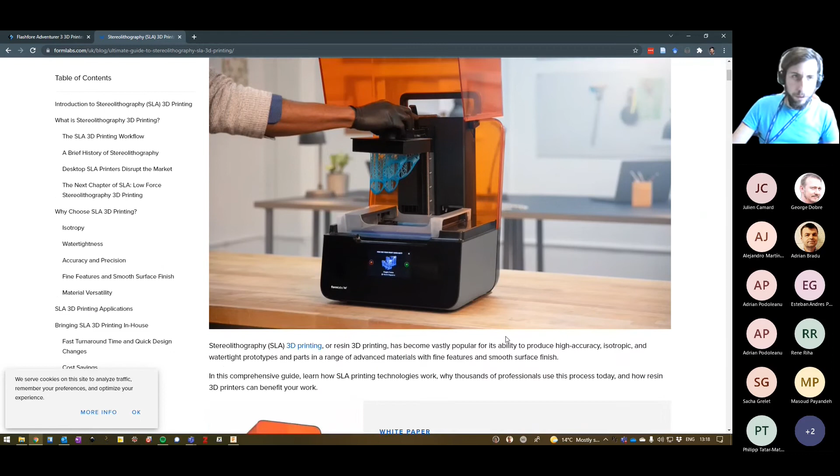And so afterwards you can wash the rest of the resin and are left with some solid bits. And because you are using effectively an optical system, the resolution is actually better. But I don't really want to go into too much detail here. Firstly, because we don't have such a printer, and secondly, because it's not something I've researched that much, precisely because we don't have one. So we are going to focus on this printer, and I'm going to show you later how you can load things into it, but I just wanted to give you a brief 5-minute introduction to how these printers work and what their limitations are.

And one of the obvious limitations is when you build something to put in your system, chances are you might need to bolt it somewhere, or you might have components that you want to immobilize inside the 3D printed component, which means you will probably want to put a set screw at some point and put threads. And that is a problem, down to the limited resolution, and also down to the material itself being quite brittle. Threads are kind of the Achilles heel of these printers.

So a more clever idea than trying to model a thread in the 3D modeling software and then getting the printer to print it, is to do what we call a nut capture. A nut capture is, as the name implies, a structure to capture a nut. So a hexagonal nut that you use in the lab. You've got lots of them lying about in your labs. You create a hex-shaped hole, and you've got the dimensions for them. And after you've printed the part, you simply drop the hex nut in there, and that forms the thread, if you want to call it that.

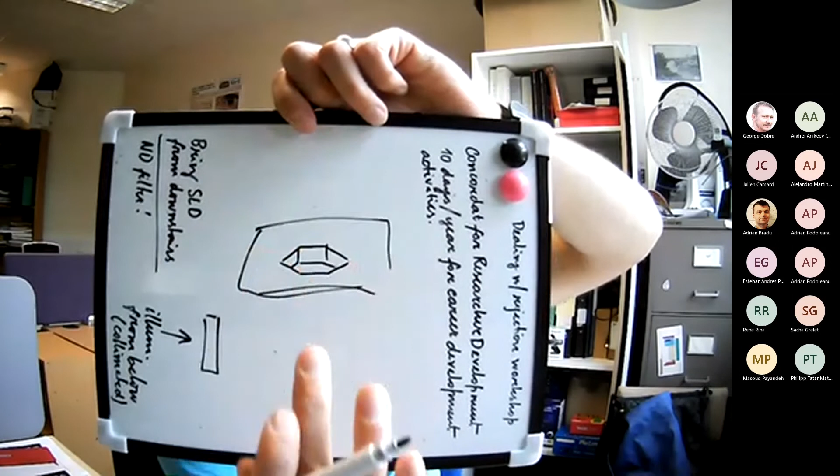This is not going to work because if we want to screw it in, the motion of putting the screw in is going to pull the nut out. So we actually want to insert the nut capture down here, and then the screw can come from the outside, but the nut will press against the inside of the structure. Does that make sense?

And another nifty trick that I learned recently is you can make the nut capture ever so slightly narrower than the nut itself. Then you grab the soldering iron and use it to touch the nut and heat it up, and because the melting point of PLA is only 210 degrees, the soldering iron will be on 300, 400 degrees easily. Well, probably not 400, but it will be higher than 210. So you heat up the nut, and the nut will effectively melt the surroundings and lock itself in quite neatly. So that's quite a good thing to do.

Strength of the material, that is an important thing. So obviously, anything that is extremely load bearing, I think that goes without saying, you shouldn't do 3D prints on. I mean, most of our components are relatively lightweight, or lenses, collimators, etc. So that is not really a problem. But if you do the model properly, you can actually have a little bit of strength.

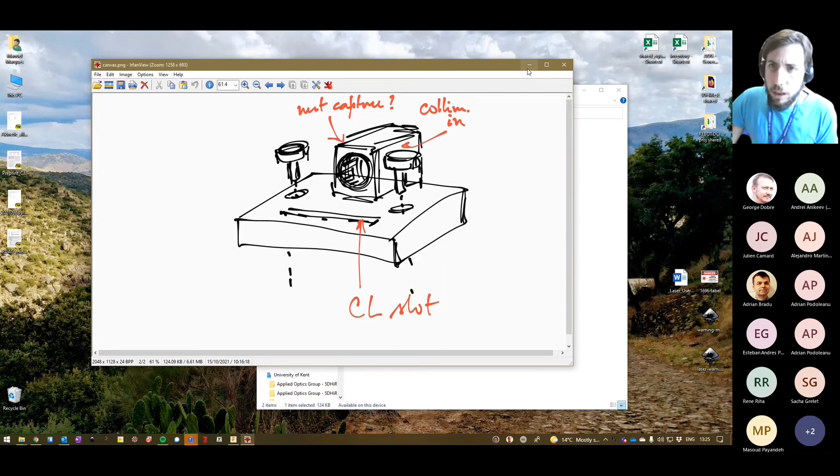So you start with a sketch, then you go in the lab and you measure the actual distances. So this is a top view of the same bracket, and now I know the space between these 2 holes is 150. You make a note, actually I didn't make it here, of the diameter, what kind of screws you need, to make sure you've got enough clearance to get them through. What is the diameter of the collimator, and what is the focal length, or the distances between the collimator and the cylindrical lens. Not that critical because this beam is going to be collimated anyway. And all of that.

So you do all of these bits, and now you're ready to actually take this and open a software to create your 3D model. So if you looked in the notes that I've circulated ahead of this, there were a number of different softwares that I suggested. There was a big list. You've got lots, the sky's the limit. There are some free ones, there are some commercial ones, there are some that have completely different paradigms.

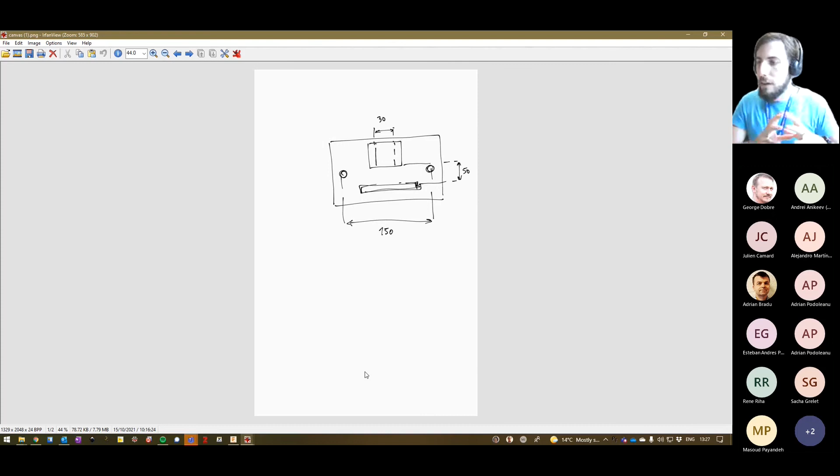So the one on the bottom of that list, OpenSCAD, I was recommended that software by Dave Pickup a few years ago because, well, he likes that kind of thing. And effectively, it's a bit like the LaTeX approach to 3D modeling. You write the different constructs in code, and then you see the rendering straight away. So if you don't like LaTeX, OpenSCAD is not for you.

But actually, for the vast majority of things, and to get something done really quickly, Fusion from Autodesk is very, very good. And because we are in campus, they actually offer it for free for educational use. So you basically go there, you say you're in a university, and you get access to a 1-year license. Then the following year, you just go there again and renew the license. It's that simple. And Fusion is relatively intuitive, so that's what we're going to be using today.

But I should stress, it isn't the only software. Effectively, anything that exports a file with the STL extension, which is an extension you'll see a lot for 3D models, can work in this. So you're not limited to Fusion. You can use whatever you want. And there are some open source ones like FreeCAD, which I know Andy was using. Obviously, if you're more of a SolidWorks person, you can use SolidWorks.

Right, so let's build a simple model, based on that sketch that I was doing. So we start with this view. I don't know if anyone wants to follow on their computers, but if not, I will just build it here. And because this session is being recorded, you can watch it later on and follow it as I'm doing it.

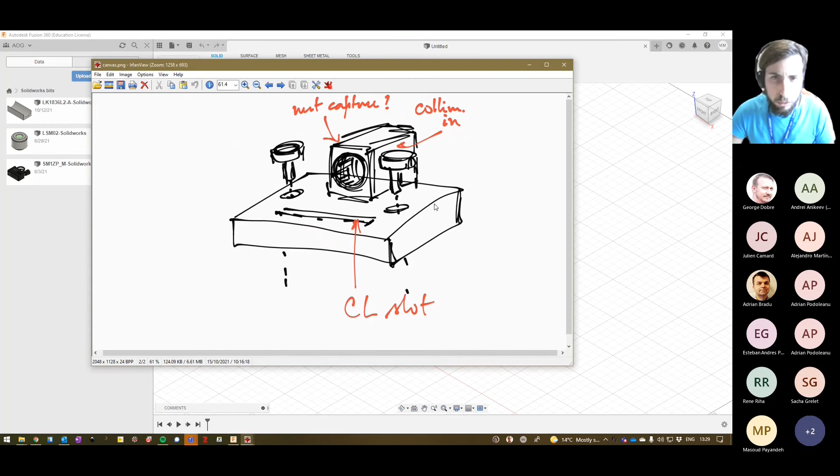So the first thing is, remember that drawing that I did, not this one, the other one. No, cancel. Where is the other one? Yes, this one. So what we're going to do is try and make something similar to this in a sketch, because everything starts with a sketch. So we go here, you create a sketch. We can select the plane. So let's start with this plane.

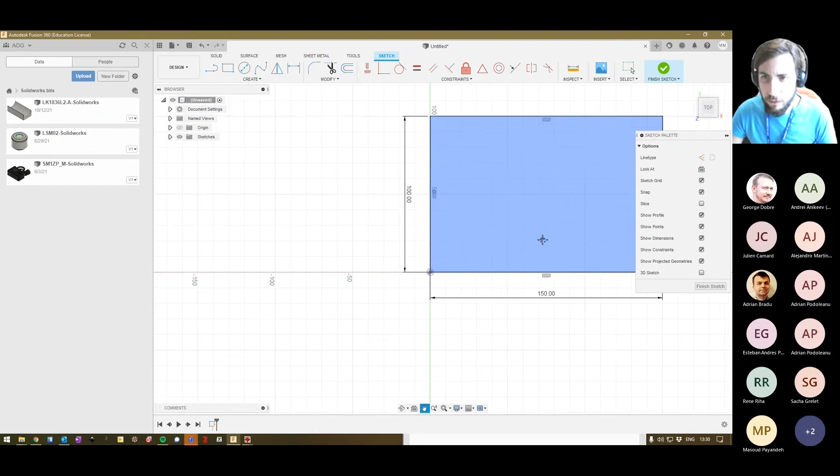And now we know what we want to do. So it's already in millimeters. I think it was 150 wide, and then probably around 100 tall. Okay. It wasn't so critical, but it needed to be larger than 50, obviously. Right. So we've got the base plate. And we can probably add the screw holes, because those are the two screw holes that we actually need. We can put them in the center.

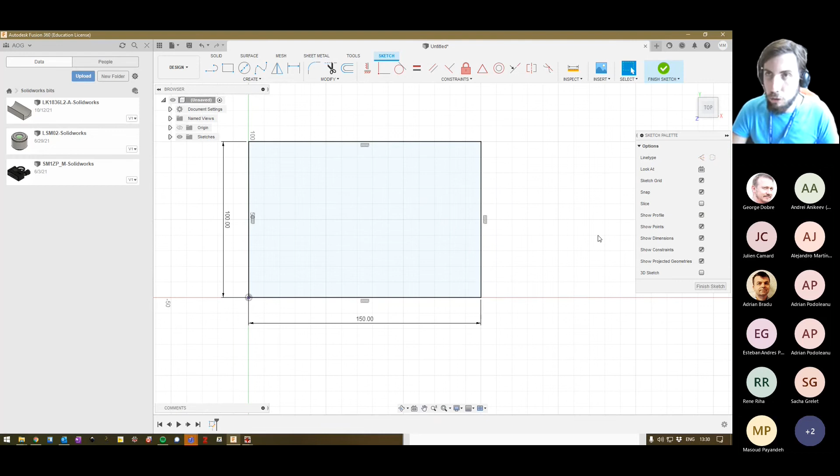So it's important to know that sometimes when we are printing things, holes do shrink, especially with our printer. So what I always do is you measure them with a vernier, right? You measure the diameter, and then you add maybe 0.2 millimeters. It's not a problem if you go smaller, because you can always file them and make them a little bit bigger. The other way around is more complicated. It's like going to the hairdresser's, right? You cannot restore the long hair, but you can always cut more.

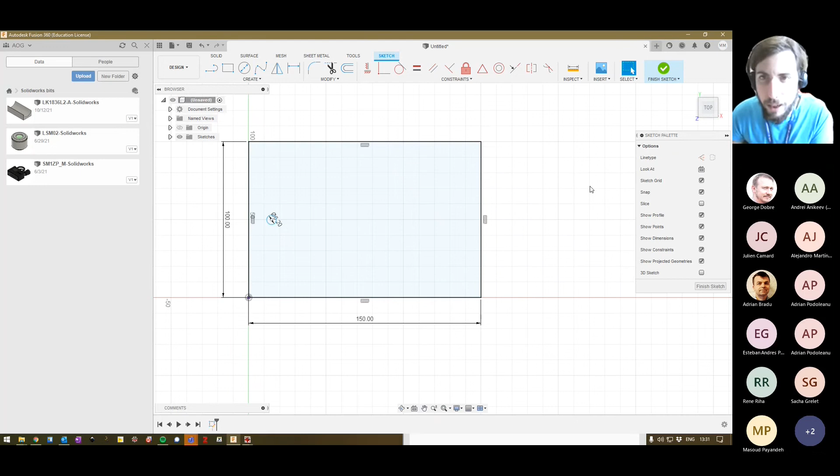Okay, so let's place a screw hole here, and don't worry too much about where it's going. So I'm just going to say this is 6.2 millimeters in diameter. Now I've made one hole, but I actually want this to be fairly symmetric. So what we can do here is create constraints, and we can mirror this in relation to there. So for that, I'm going to create a line, and that line is going to be from the midsection. You see here, there's a middle line that appeared.

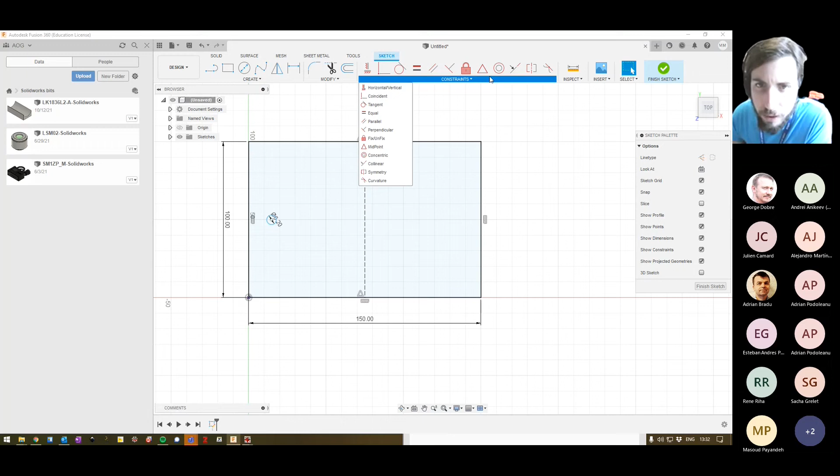And I create it. I can make this into a construction line. So you see here, if I right click on the line, now it's a construction. So it's actually not part of the drawing, it's something to help us. And now I go here and I can do a symmetry. I need to first duplicate the object. Sorry, hang on. So if I select this bit and I copy paste and I shift it here, I don't care where it's going, because that's going to be determined by the symmetry constraint. So I just moved it out of the way.

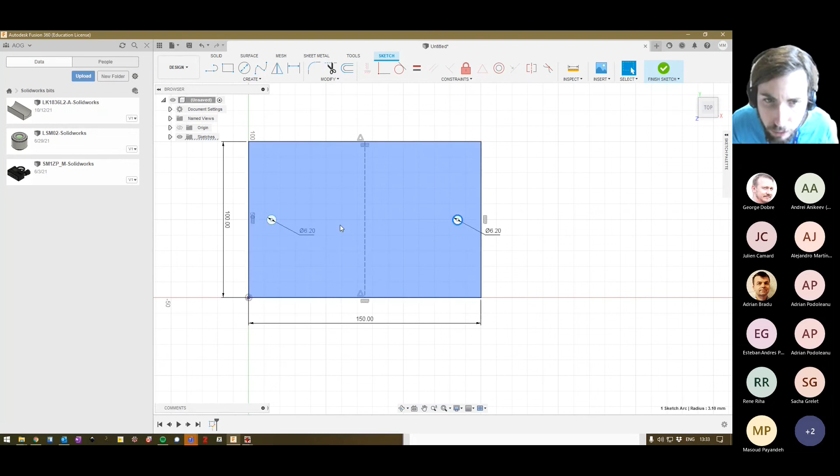So I will select that, and select that. And then select that, and that. Why are you refusing to do it? I think I need to select the object first and then symmetry in relation to this. There we go. So now you see this little line appeared. And if I ever decide to move one, you see they move together, because they are both symmetric to the plane. And we can constrain this even more.

So we can add a length constraint here. So we can fix here to here and define a measurement. Where is the measurement? Linear, curvature, because this is slightly different from what I remember from Autodesk. Coincident, tangent, no. Here, sketch dimension, sorry. So you click here on the center and you click there, and you see we've got here a dimension. Yes, we're just going to create a driven dimension.

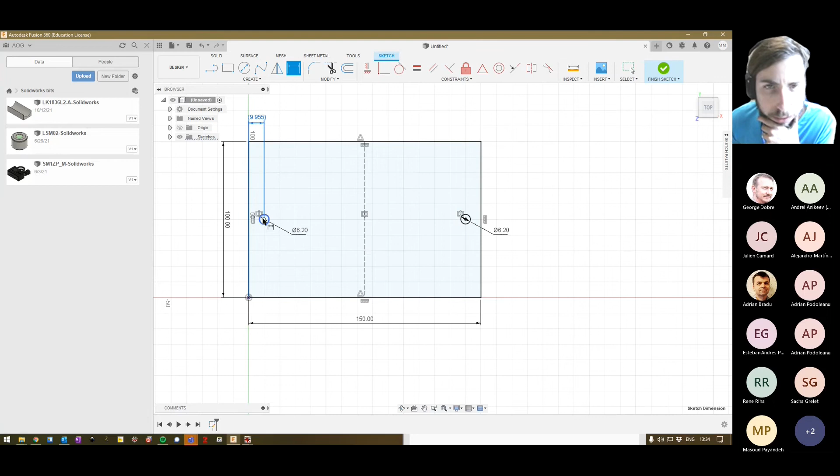Now, I think we can move this. So it's fixed now. Yeah, so now I'm not allowed to move it anymore because it's stuck there. So if I want to move it again, I have to delete this.

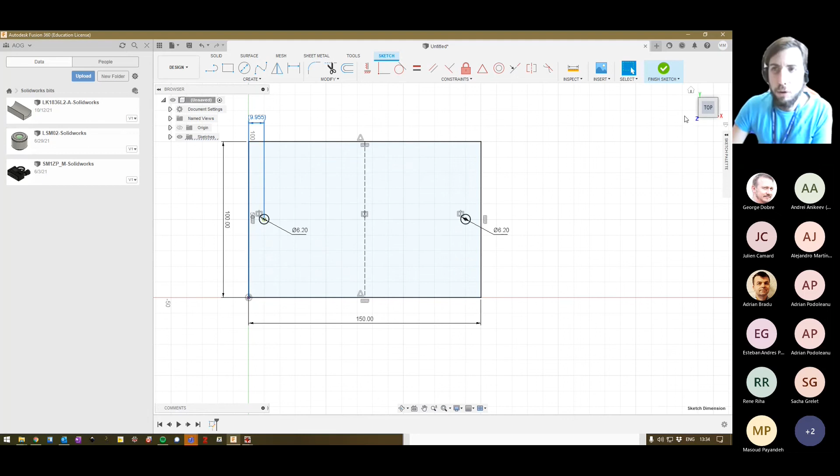Does that make sense so far? So we made the screw holes. So I can hit finish sketch. We've got a 2-dimensional thing in a 3-dimensional space. So to pan, what I do is I hold the shift key and then the middle mouse button, and that allows me to orbit. You can see that this is in 2-dimensional space.

To put it in 3-dimensional space, we extrude. So if we click here, we can drag, or we can add the numbers there. So I'm going to put it as 1 centimeter tall. It's probably a little bit too much, but that's fine. So we've got the base of the plate now. We've got the first part of the sketch, if we remember from the drawing. Now we need to add this bit and this bit.

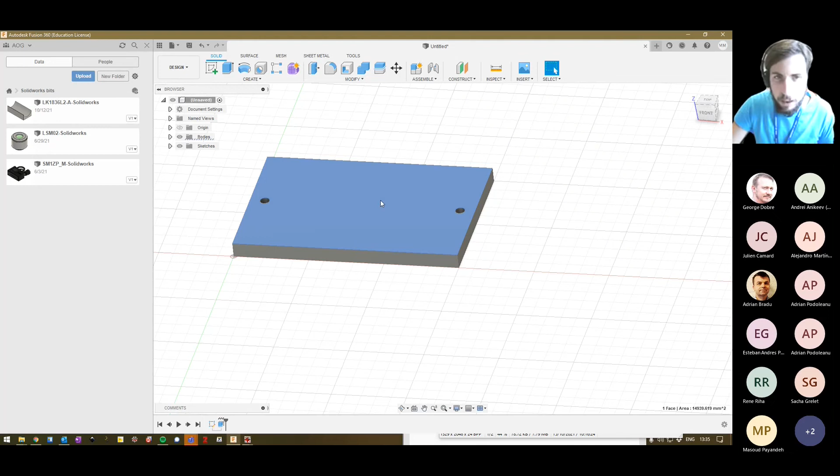So for this, for the collimator, what we'll do, we can do it again. We click here, and now we are creating a sketch not on the bottom on z equals 0. We are creating a sketch on the plane z equals 10 millimeters. So we click here, and you can see it moved it to the top. It shows here the top, so you can visualize different sides like this. So we are at the top.

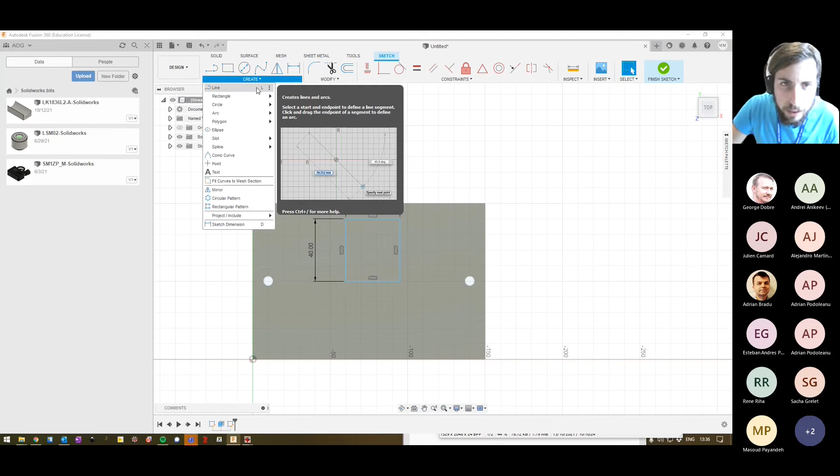That's good. So now we created another rectangle, and we wanted this to be, I believe, larger than 30. So let's say 35, and then here, let's say 40. Okay. Now, this isn't very centered. So again, we can create another line and put it in the midsection as before. Change this to a construction. And now, because this is constrained, we can create symmetry between these two and that, and now it's nicely centered.

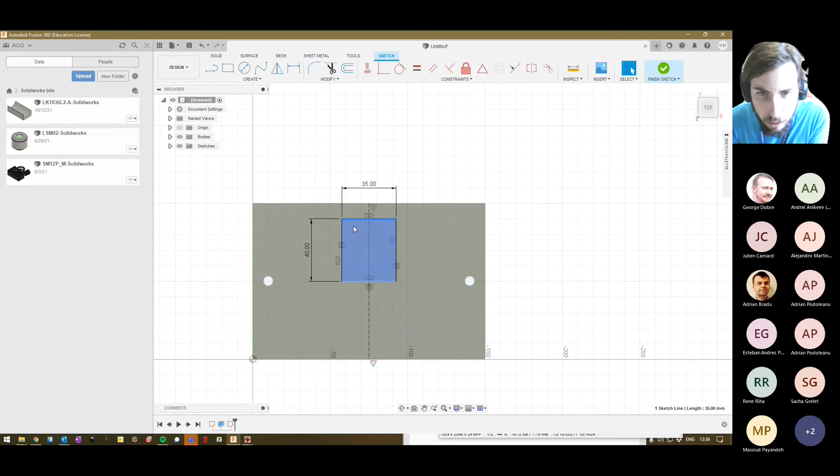Good. So now I think we can only move the box along this direction, which is what I expected. So we can move it all the way down here. That's fine. Okay. And that's all we needed to add in this dimension. So we hit finish sketch. So you can see we've got a little box here on top of the other box. So we now hit extrude again, and we need this to be larger than 30. So let's put it at 40. And we hit OK. And that is starting to take shape.

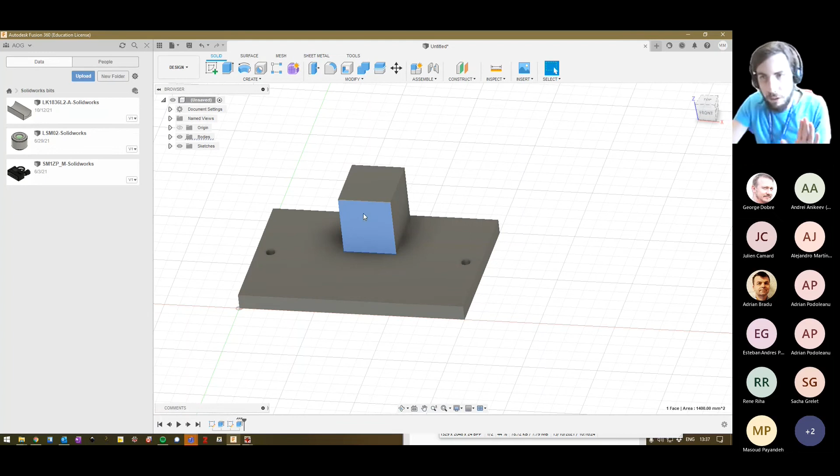Now we need to create a hole for the collimator to go through. So what we're going to do is we are going to shift the plane of the sketch. So instead of doing a sketch from above, we are doing a sketch from the front. So we click on this plane and we hit sketch. And as you can see, now we are perfectly facing the part. So again, we can create a line. We can select in the middle. And that is a construct. And now we can create a circle right in the center. And we can do the 30 millimeter diameter.

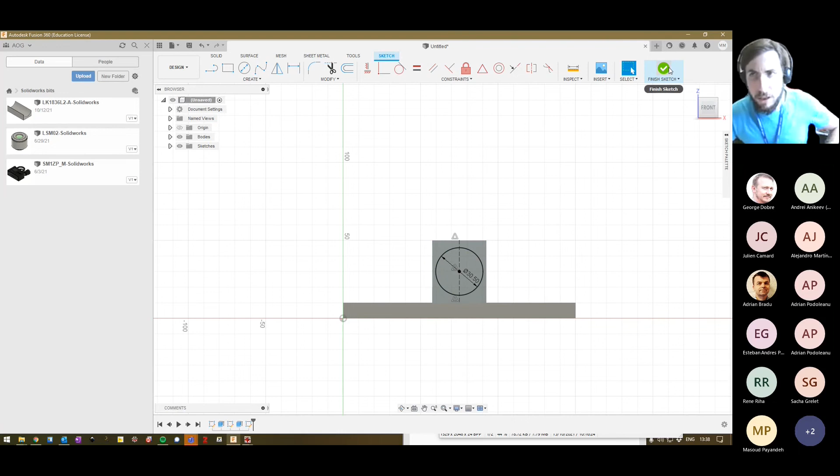Now, remember what I said about the filament shrinking. So probably 30 is not the best. So let's say 30.5. I would normally give it at least half a mil of diameter extra to account for the shrinkage. So we hit finish sketch. And now we need to actually take material off. It's not putting material in, it's taking material off. So we could have created a hole, actually. That would be the same thing. But we decided in this case that this could work.

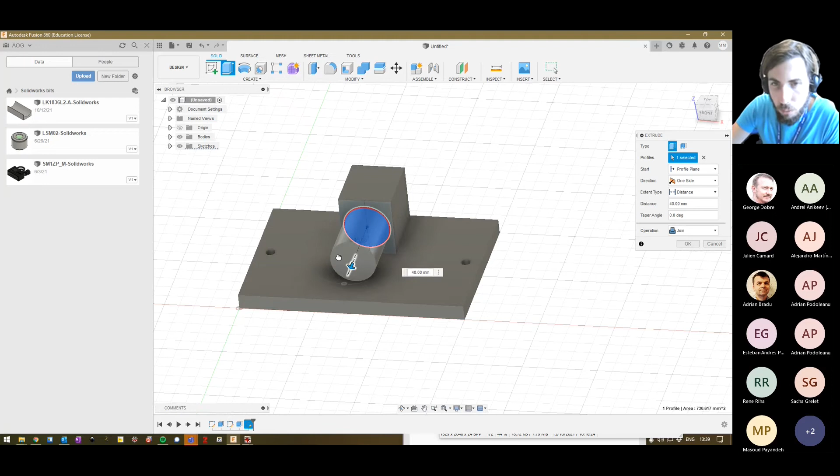So extrude also works in the other direction. So if you click here, instead of pulling, we push it, it doesn't matter because obviously here is empty space. See, the operation changes to cut. And then you hit OK, and ta-da, we've got a nice little hole here. So that's all sorted. We've got our collimator mount. Now the last thing was the slot for the cylindrical lens, and this is where it gets interesting.

So we could just go and measure the lens and think about what the dimensions, the thickness, etc. are. Or we can be more clever and go to the Thorlabs website. So I can't remember what this lens was called, LK1836L2.

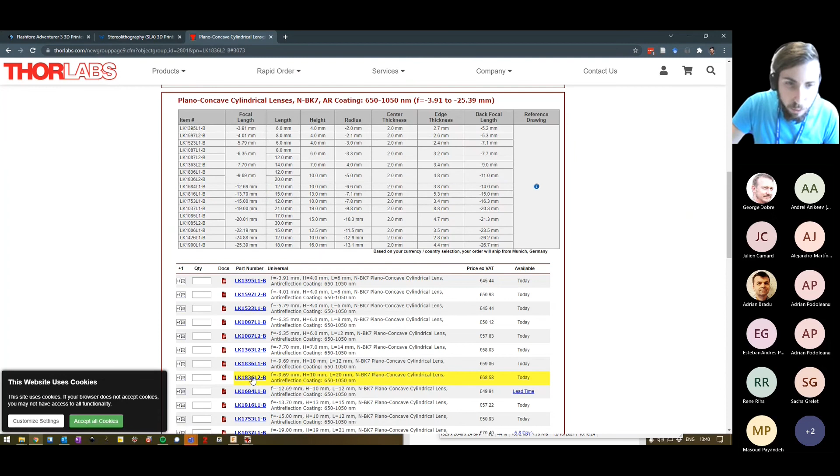So there we go. There's a cylindrical lens here. Doesn't matter if it's B or C, I mean, this is only the coating. And we click on it. And you've got here, obviously, you can click on the AutoCAD PDF and that will tell you all the dimensions, etc. But actually, we can do better than that, because if we want to have a bracket that is exactly the shape of the lens,

they've got a SolidWorks download here. And obviously, I know that we are using Fusion, not SolidWorks, but Fusion also can import and convert from SolidWorks, and that's exactly what I did here. So you can, by hitting this upload version, because the difference with Fusion is a more consumer-oriented or end-user-oriented rather than professional-oriented software. It's got the best bits of AutoCAD, but without the complicated bits. That's why it's more intuitive and easier to use.

But everything is run on the cloud, so you have to create an account, and then you've got storage. You can collaborate in projects, which is quite nice if you've got more than one person doing stuff. But it also means that any project files need to be uploaded to the cloud. But you can do that very easily, and it will convert SolidWorks stuff into something that can be used.

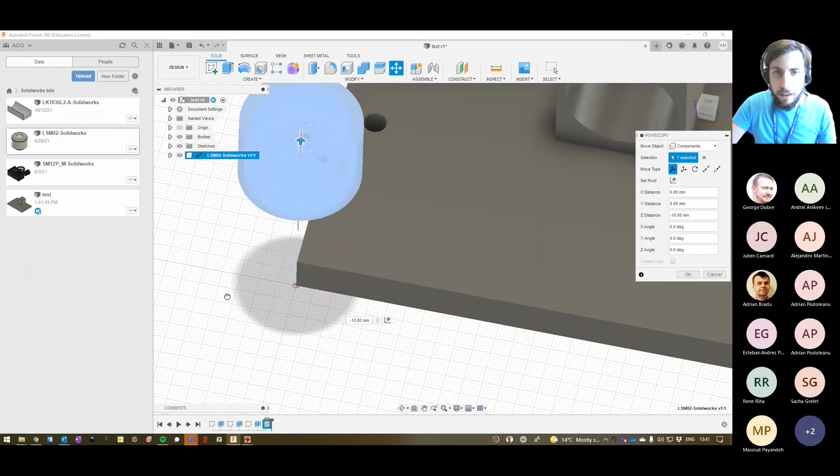So for instance, here I've got one of the big OCT lenses, the LSM02. What happened here? I need to save the design. So let's save the design. Let's call this test. Very imaginative. And then we dump this here. And ta-da! We've got the LSM02 lens, which we can move around. We can rotate it. So it's got all the details from the model with all the dimensions.

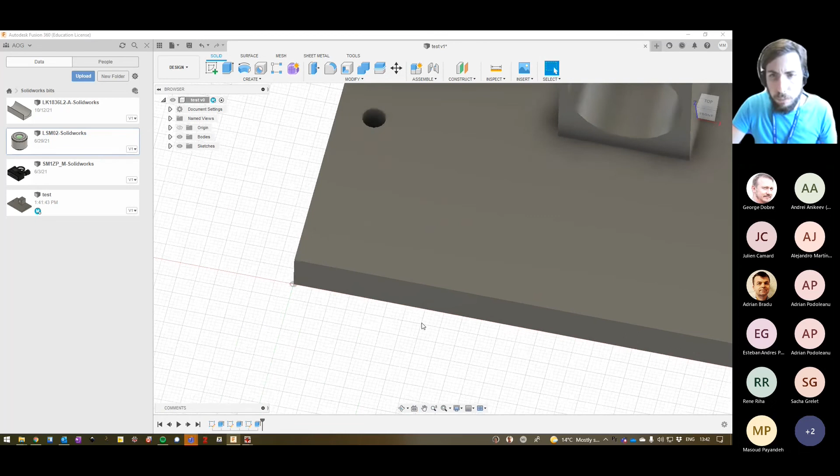So I'm going to cancel that. I'm going to take this away. So you can see it's inserted here. We can kill the visibility and that disappears, or we can just erase it completely. Okay, so another quick little tip. If you want to pan rather than orbit, you just use the mouse middle button or the mouse wheel, and you can pan around like that.

Okay, so I've got here the lens. So I'm just going to drag and drop it. And actually, this lens is a lot smaller than the rest of it. But that doesn't matter because we can scale this. I believe somewhere there is a way to scale this model. Move copy, scale, replace face, scale. There we go. Entities. Why don't you scale? I'm pretty sure that this was able to scale. Maybe not. Okay, never mind.

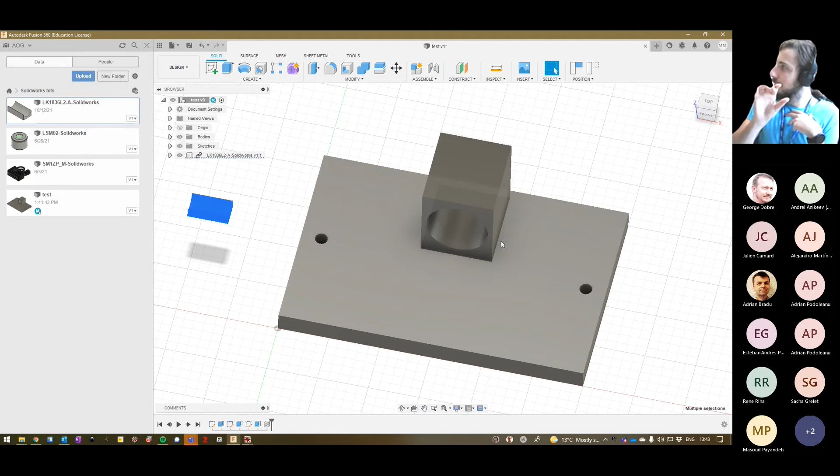We'll just make a very ridiculously silly thing. But obviously, in this case, I should have used a larger cylindrical lens because the rest of the components are enormous. I mean, realistically, a collimator is not that big. Sorry? In modify? No, below. Oh. And then you have scale. Yeah, I did that, but it doesn't work on the external module. I think it's only on parts because this is a different entity. Thanks, Adrian, but no.

No, thank you. Okay, so let's just move and copy, and let's just put it in front of the thing and ignore the fact that it's looking gigantic. So we can rotate, and we select. Well, we used to be able to. Why can I not move it again? Move, copy, rotate, components. Ah, that is it. Now, we select the axis. Now you see we can rotate it, but actually that's the wrong axis. So let's do it again, because I wanted the other axis. I want to be able to basically put the lens on its top.

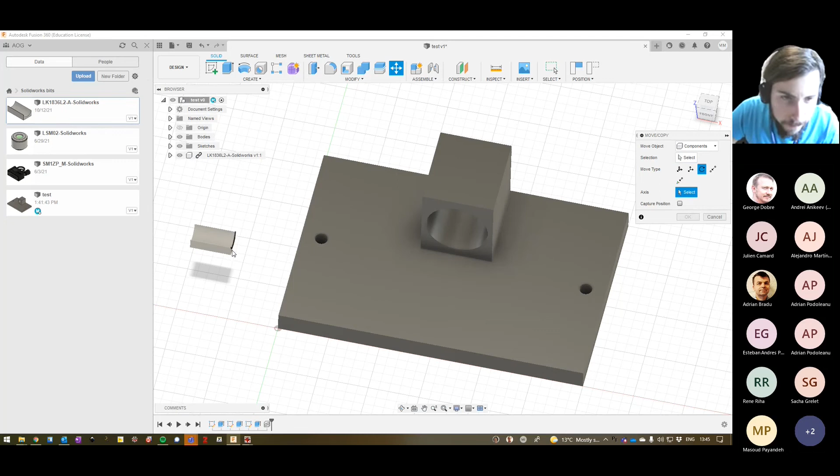Components, rotate, select the axis, and we go this one. Let's zoom in a little bit. This one. And oh, I didn't select the component. Oh, I did. Why are you being silly? Sorry about that. This was not meant to be happening. Apologize for that. It's a component. It's this component. Aha, there we are. Right then. I don't know what's going on here, but the axis is wrong.

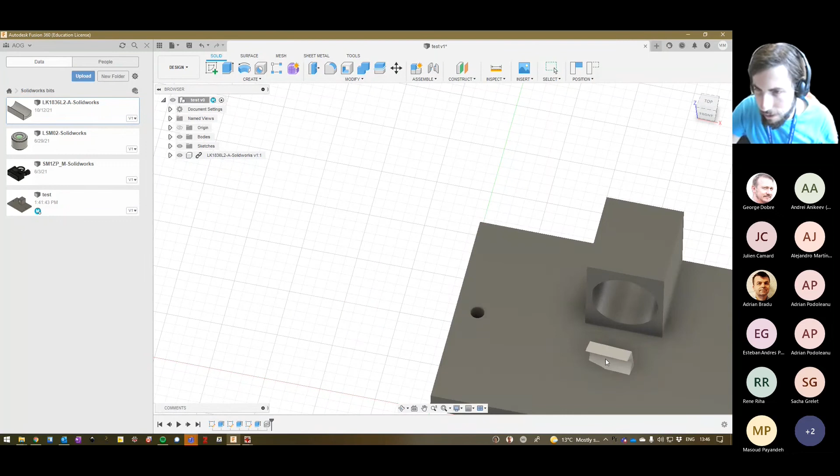But what I wanted to illustrate here, if I actually had the thing properly, is that you can actually use this and subtract one thing from the other. That is actually what I wanted to show. So by going to, where was it? Sorry about that. There was a possibility to take this and cut the other one, but I cannot seem to be finding it. I think that's here. Yeah, and now if we hit extrude,

what? Why did you do that? Select this face and extrude. Capture the current position. Yeah. There you go. You see, we can actually cut using the information. Well, we were, what happened there? Cut.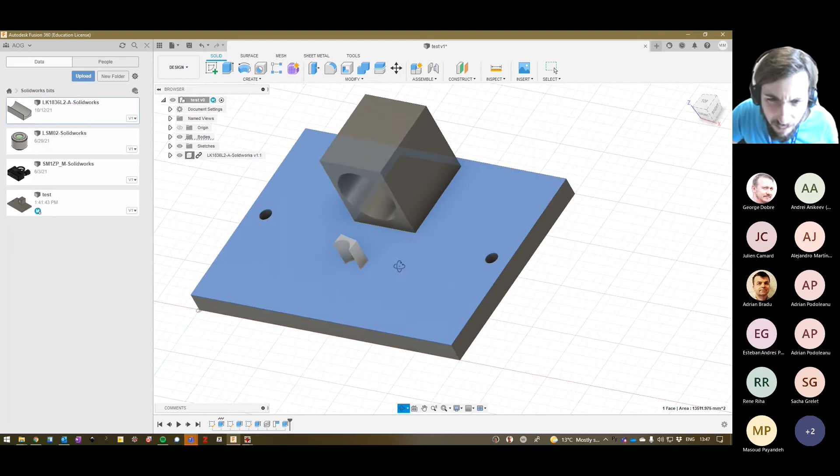Cut. Why do you mean no target body found? Ah, because I already cut it. Okay, so you see, it's already been cut. So I created a little shape for the slot.

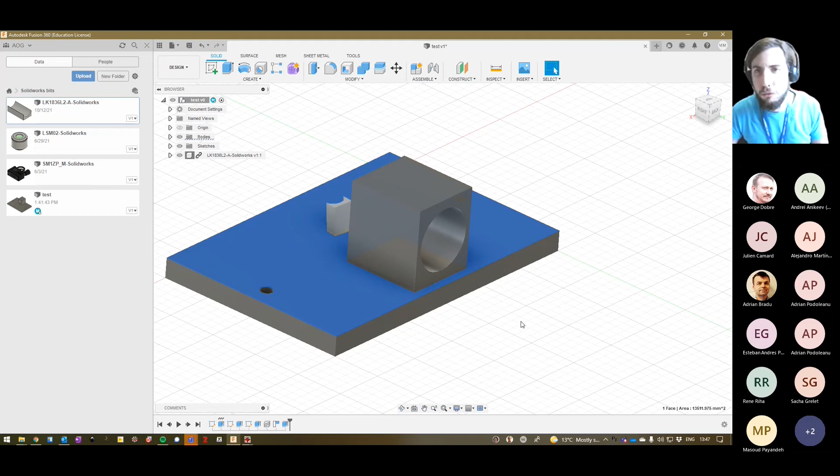Anyway, so I apologize. It didn't go as well as I planned it, but that gives you a little idea of the kind of thing you can do to sketch it. And then obviously, once we've got the model, and this one obviously is hopeless and it's a bit rubbish, but we can get it ready to 3D print, because as I mentioned earlier, we have to export these as an STL file, which means we have to get this out of Fusion and put it elsewhere.

So if we select here and we go into the Tools tab, you've got here this Make option. You can actually send this away to be printed somewhere else, but obviously we've got our own printer, so we don't need that. So you could save it as an STL file and then load it to your 3D printing software. I'm going to explain more in a bit. Or you can directly send it to the 3D printing utility.

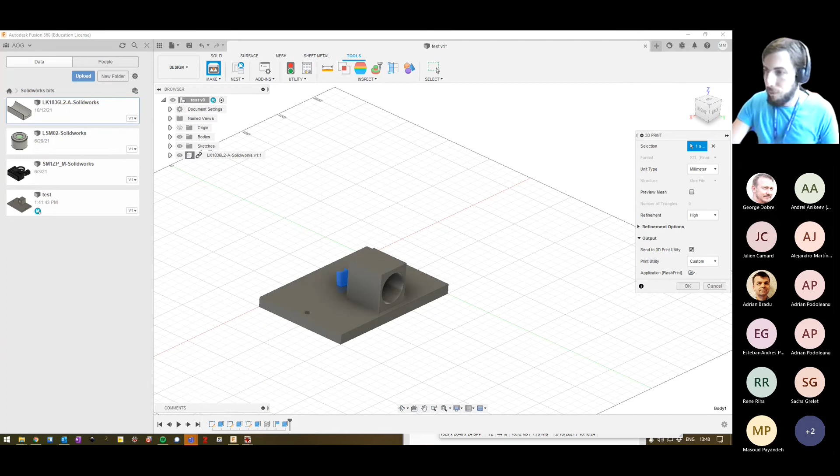So we've got here, I've already pre-configured this for FlashPrint. And FlashPrint is the software that FlashForge makes to use with their 3D printers. So what I'll do is I'm just going to send this model to FlashPrint. So if I select all of it, why can't I select the whole lot? Oh, now I see, because this has disappeared.

Okay, so there's the cylindrical lens shaped hole, because obviously we don't want the cylindrical lens itself. We just want the hole that we created. Okay, so we select everything. That's the selection, and then we hit OK here, and that opens. Yes, put it on the platform.

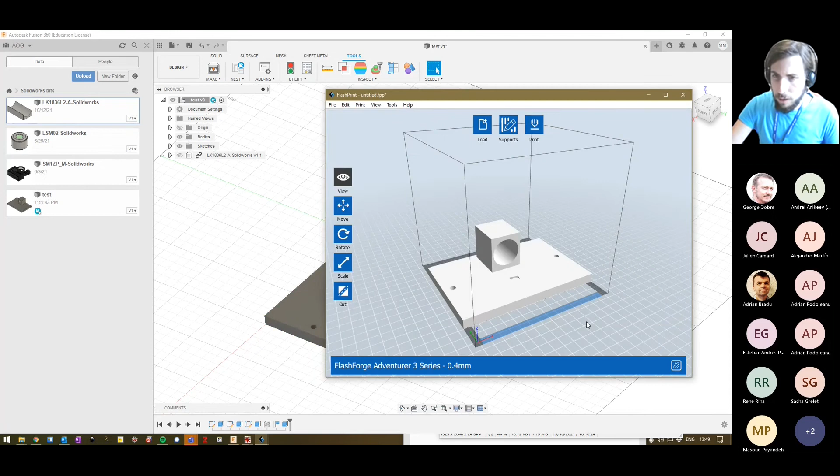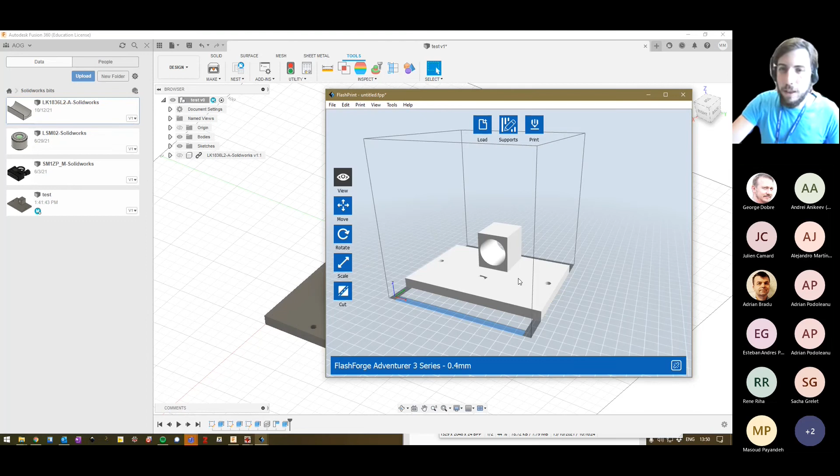That opens it, and as you can see, because I've designed the thing with 15 centimeters by 10 centimeters, I was thinking, yeah, this is in millimeters. So that's 15 centimeters by 10 centimeters. It's a huge, gigantic bracket. So that's why the lens looks so small there, because yeah, I scaled it in my head too much. So it just about fits the plate. I mean, you could scale it if you wanted to, but obviously you scale everything together.

So effectively, this is a very interactive, very easy, intuitive GUI to get the model in the printer. So this is how it's going to be printed on the actual printer. And then we could just hit print here, and we could get it underway. Well, not so fast, because even in this model, especially if I scale it, which is relatively simple and innocuous,

you may have problems if you print it like this, because as I told you, the printer will go layer by layer, vertically. So it'll get to a point when it gets to about here and starts building this section above. You will have areas where you're going to have a bit of an overhang, and so if you don't do anything, chances are that as you're depositing this layer here, it might just fall off, because if the angle is too steep, you won't have anything to rest on.

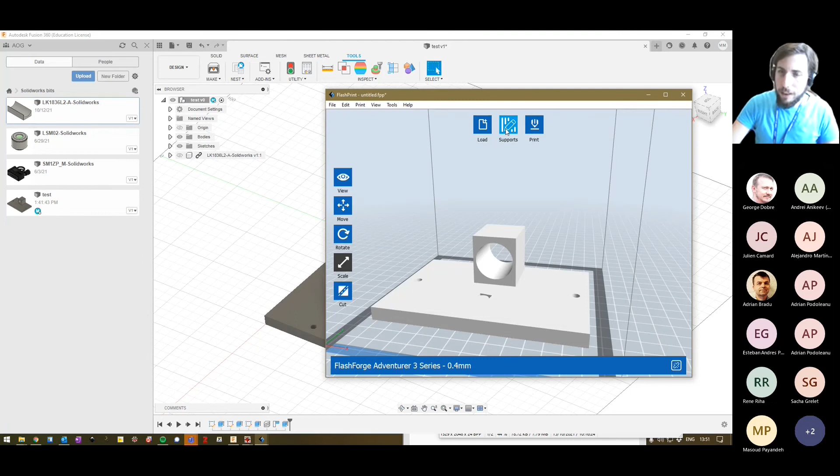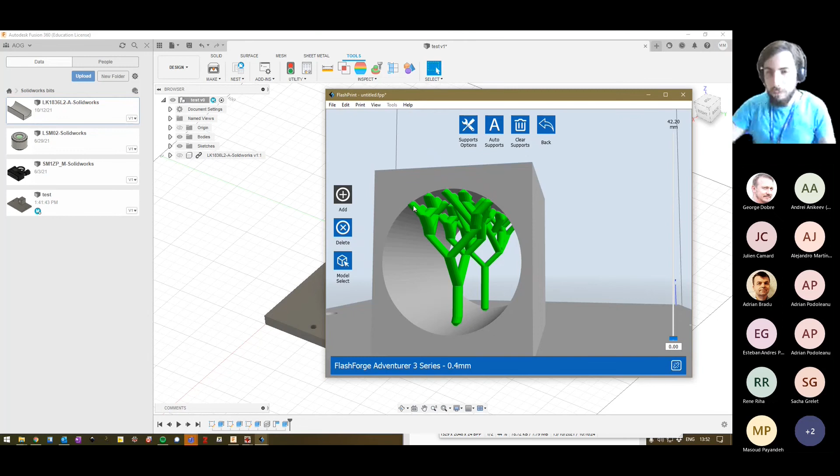So actually, that's why I've got here the supports button. If you click on the supports button and you hit auto supports, you see that it added these little tree structures inside this void. This is very necessary, because if you don't do that, chances are that this, as it's being deposited, might just fall off, and you end up with just a spaghetti mess in the middle. So you will want to do the supports. Sometimes you are able to get away without using the supports by being more clever about how you print.

So you can rotate the model, and by rotating the model, you see, now we don't actually have a problem there. We may have a problem. It's not fully rotated. That's the problem. You can actually rotate specific fixed amounts of 90 degrees, which is probably what you want.

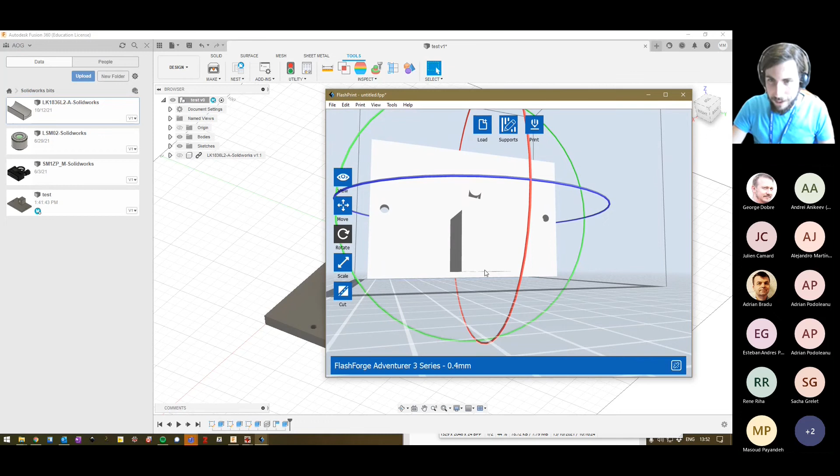But even then, we've got another problem, because now you've got this overhang here. So if we create the support, it's going to have to support this structure here. It won't need to support the hole inside, because now we are depositing from the bottom up. So actually, this will become more evident if I hit the print button, because then we can evaluate how the layers are being deposited.

So you see here, it created 486 layers, and we can scroll through them and see exactly how the printer is going to be printing. And as you can see, that's how the printer prints it.

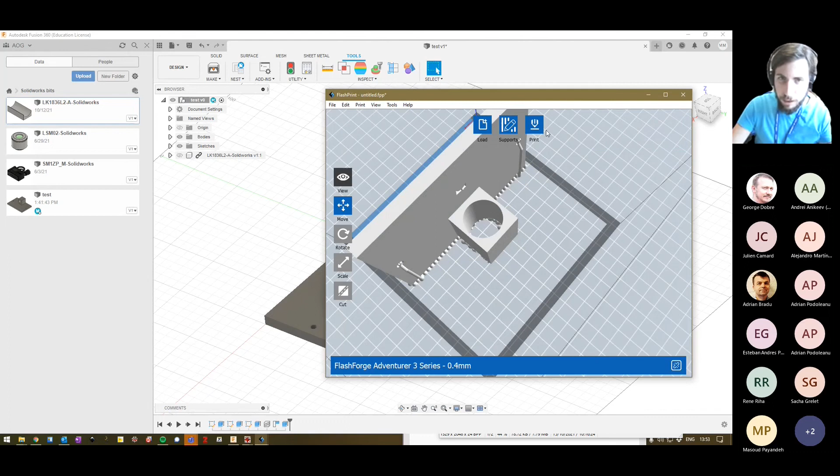Okay, so from the bottom up. So there's been a few things that happened when I hit the print. So let me get rid of these supports. And actually, I'm going to get rid of the model altogether and just load a model that I've got here, which some of you might have seen. It's called Benchy, and that's this little boat.

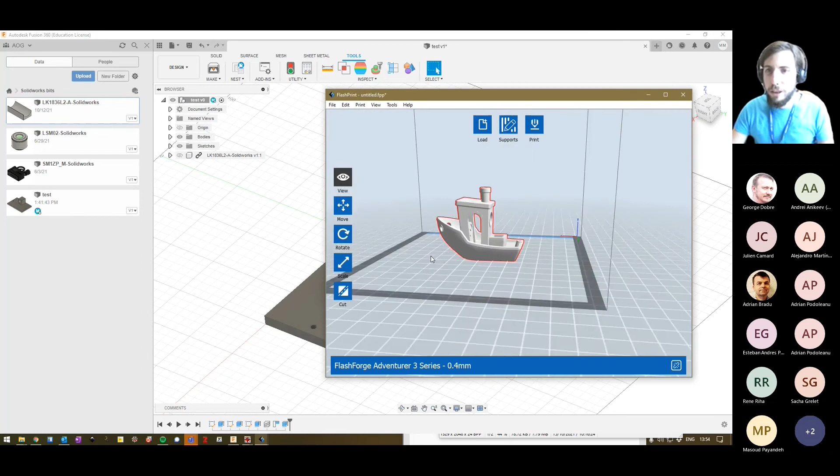And this boat is used to benchmark 3D printers. So if you want to test a new brand of 3D printer, you normally print this model, because it's got lots of features that 3D printers struggle with: namely, you've got this massive overhang on the bow of the boat, you've got structures inside, you've got angles everywhere. So if you're trying to print this without supports, that's going to be a mess.

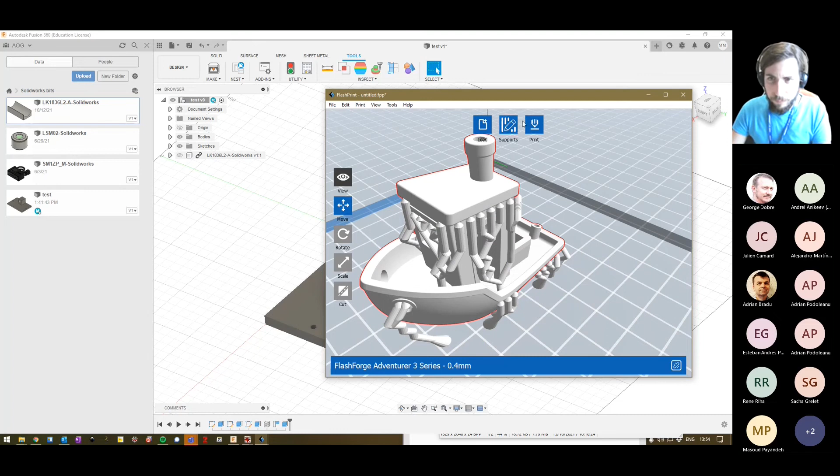So you have to support. You hit the auto, and as you can see, these structures are sacrificial, because they won't be part of the model. You will cut them afterwards, but you have to print them like that. And obviously this is the preferred direction for printing. Let me get rid of these supports, and I'll show you some advanced print settings.

Because as you can see, even if I don't put any supports, there's some additional material that is printed. Namely, you've got this little base, this little pedestal almost. That is called a raft, and normally that is needed. So actually, on the default settings it's printed.

Effectively a raft ensures that the model stays in contact with the base on the very first few layers, because otherwise, if there are some non-uniformities in height and you start by building the model almost against the plate, you might screw things up. So it's important to build that raft like a solid base. And again, this is sacrificial material. You peel it off, because as you can see here, Benchy does not have the raft. This background feature is making Benchy invisible, but yeah, I've peeled off all of that after it's been printed.

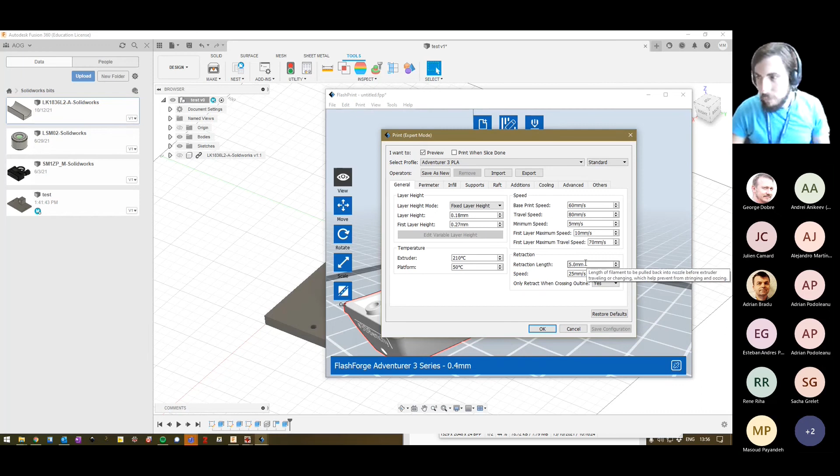So you've got a lot of different parameters here, but I would just say leave it on the default settings. The temperature ones, sometimes you can tweak them a little bit, but I think at the moment that's pretty good. One thing that you might have noticed is when I print and we go layer by layer, you see that there's this sort of hexagonal structure inside. So this is what we call the infill percentage.

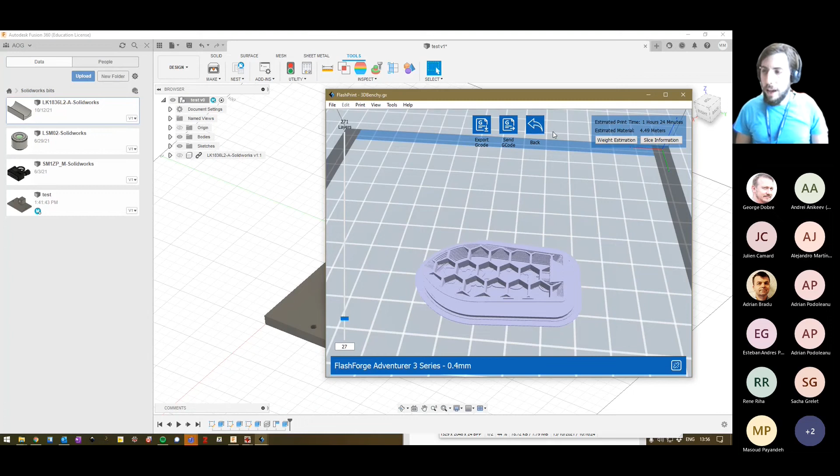So effectively, the printer, to save time, won't deposit material in every single point X, Y, Z that's supposed to be part of the model, because otherwise it's going to take forever and use a lot of filament. So you can play with this infill tab. You can change the different kinds of patterns: line, hexagon, triangle, 3D, and you can change the density. So for instance, if I put this at 60%,

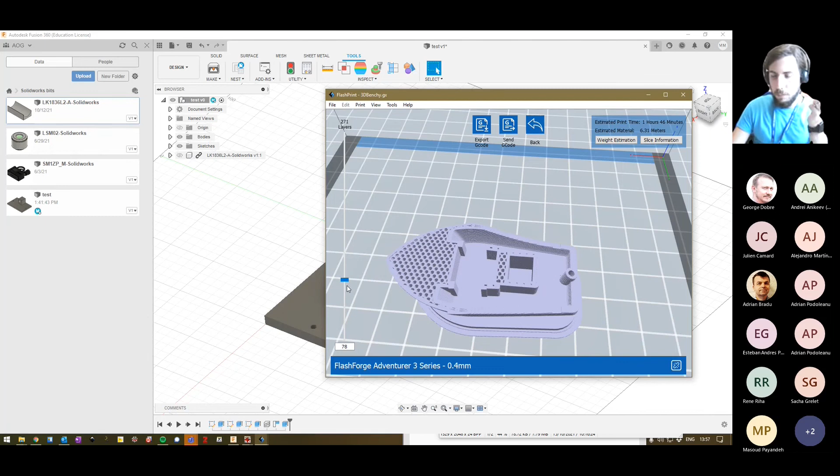and then I go layer by layer, you see the hexagons have turned smaller, but the print job nearly doubled. It was 1 hour and a bit, and now it's 1 hour 46 minutes, and there's a lot more material being used just by increasing the infill from 15 to 60%. And this was printed with 15%, and it's quite solid. So again, it depends on what you are going to be doing. Sometimes it's useful to print with a larger infill, sometimes not.

Sometimes you might want to print in a rapid mode, just because you... I think this is the advanced mode. Yeah, I've got this in expert mode, sorry. How do I change the settings to not be expert mode? Basic mode. So this is probably the view that you're going to be seeing, which does not have a lot, but it's got the support and the raft enabled by default.

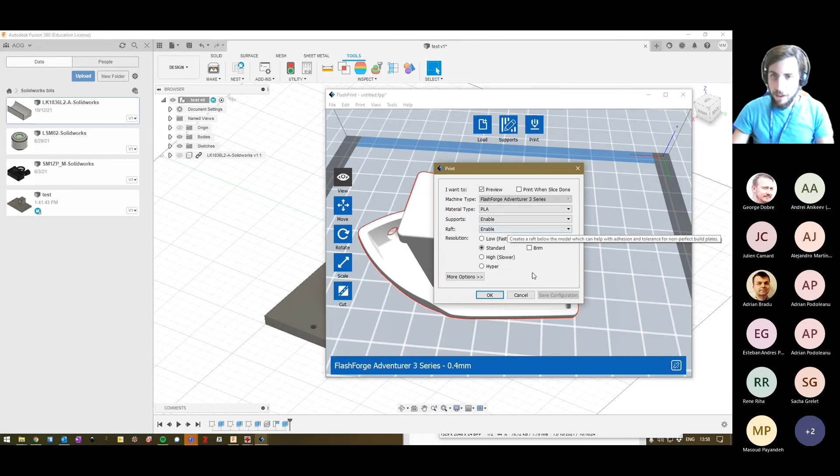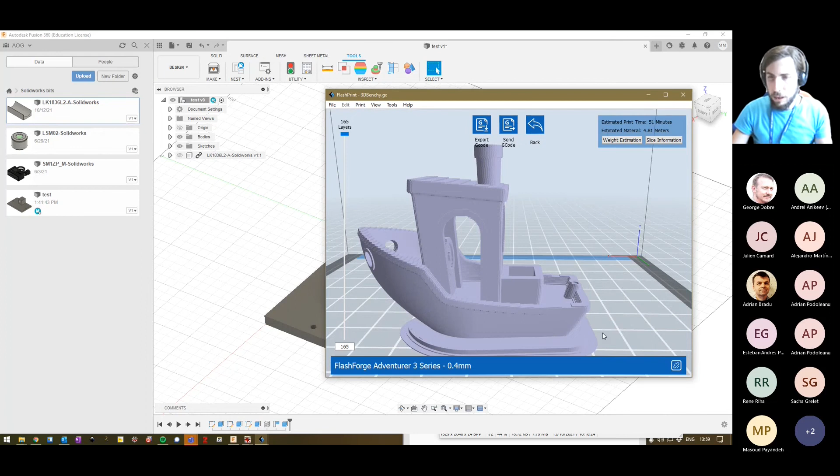And obviously, if you print in low, it's going to be less accurate. You can see that there are fewer layers, but it prints in a lot less time. You also see that there are a lot fewer vertical steps. So the printer effectively is cutting corners there. And actually, you don't save that much in filament, but you do save in time. And that is the big thing with the 3D printer: especially with a complicated or large model, sometimes jobs can take 5 hours, 6 hours. So you have to plan those well in advance.

Okay, so we built a model. We've exported it as an STL file. I've shown you how to operate the FlashPrint software.

Are there any questions at this stage? We are on the 1 hour mark. So I think Adrian B will have to disappear, but I'm just going to show you how to operate the printer now. But before I do so, are there any questions at this stage?

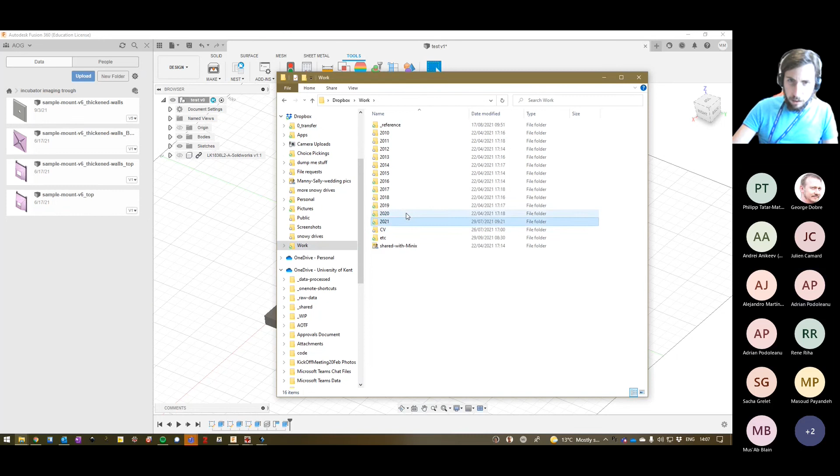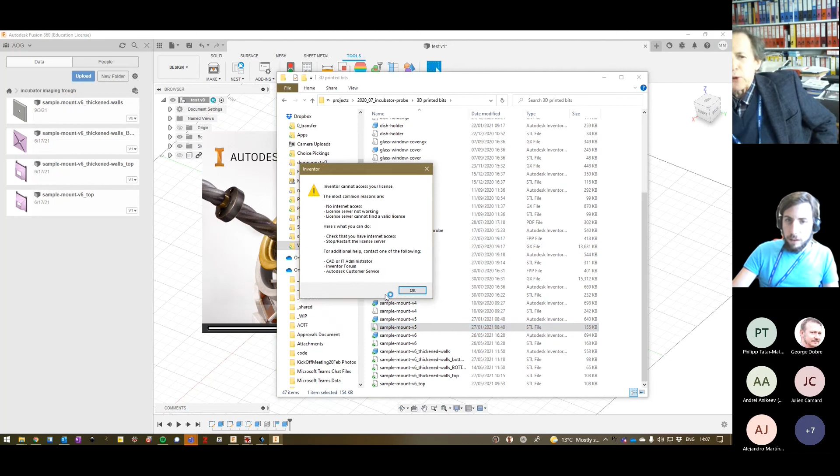Manuel, you also wanted a question. Yes, go ahead. You know that when people create software, and in 2 or 3 years' time we give the new people arriving, students or PDRAs, the previously created software, there is always a problem. Each one would prefer to do their own software again and again. With these designs, is there any way in which someone who comes fresh can take that design and develop it more, or would it be difficult for the newcomer to continue? It depends.

It depends on what software. Obviously the STL can still be imported and you can still do things to it, but you won't have access to the sketches per se. So if you export this as an STL, you could scale it, print it again, or integrate it into a different design, where you'd be able to take material off it or add stuff on top. But you wouldn't be able to say, okay, I want to add a sketch on this plane, or adjust the diameter of this. Exactly.

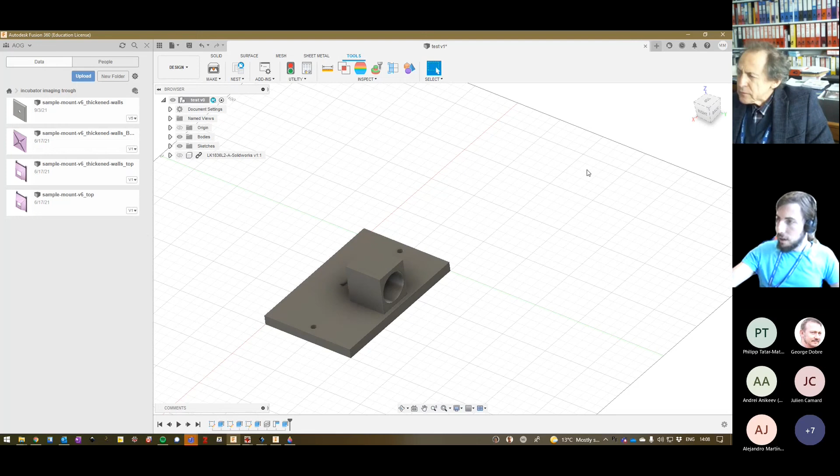If you wanted that not to be for you only, to have in time a database of designs so people can continue. If people use the same software, they can share it around. This basically goes to George's point that we can have the designs available on a central group repository for people to use. So actually, I created an AOG team on Fusion. So if people want to join, they can have their shared things, specific mounts, specific adapters.

So for instance, I've got here some mirror mounts, some phantoms as well, things that we've printed in the past. Spacers. For instance, this is a spacer for a Thorlabs lens to create a gap between the lens and the surface that we are imaging. So if people are members of this team, they can have access to these projects. I can share that with them.

One other consideration is that even if we don't have 3D printing in mind, it may be helpful to design things in AutoCAD to have them made in the workshop. Yeah, because we've got access to Fusion 360 education, we can actually create the technical drawings from here. So that is possible to do.

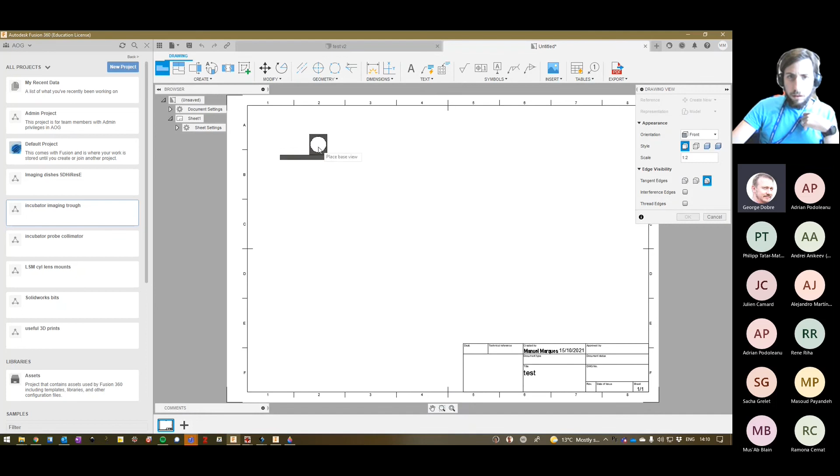And actually, in terms of, for example, the NetLAS students, it is another skill, isn't it? It's something else you're picking up as you do your PhD, to put on your CV. It is completely optional, of course, but having the opportunity to learn that is valuable. Yeah, so you can make the technical drawings like this.

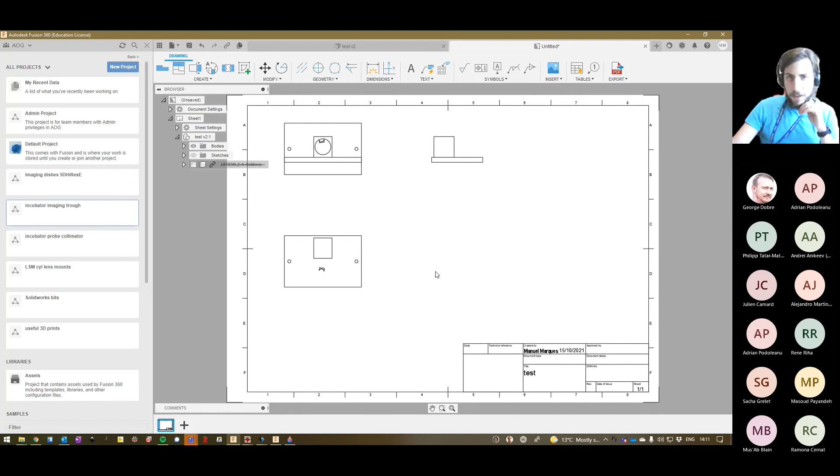Yeah. So the kind of technical drawings that you would use then to take to the workshop. So that is also possible to be done with this. And then you can export them as PDFs. So effectively, you can do that as well.

Okay, I'm just going to show you one example here. So obviously, you've got here this big thing. Let me see if I can open it. Come on, Windows. If I open it with 3D Viewer, yeah. So the STL files will open in Windows 10 as 3D objects, so you can pan around and watch them.

So this one was something I've made for my incubator probe, because for those who don't know, I'm building a system that needs to be placed inside of an environmental chamber and be left alone. And I've created a box that is insulated, but I have to place a sample and image it from below. And obviously, to make the interface where I'm mounting the sample, with the lenses below it, I 3D printed something. So I've got some screw holes which bolt to the top of the lid of the box. And then I've got here space to put a glass window, and then the lens is underneath.

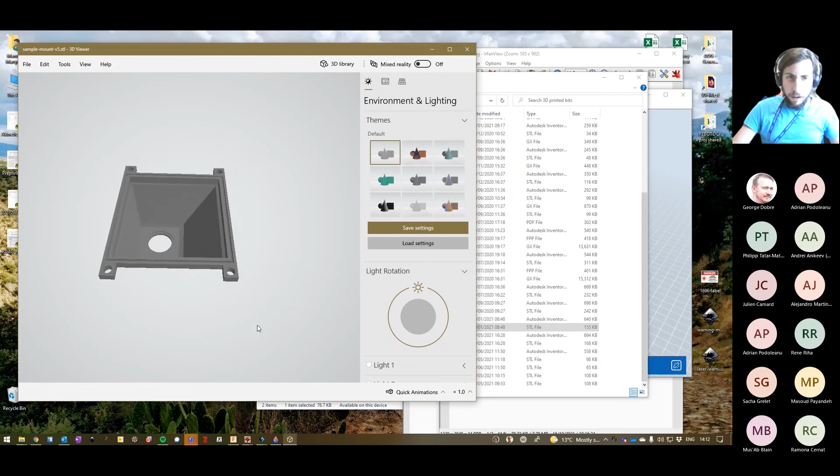This is actually a very complicated thing to print. And actually, in this case, I was advised by Phil March to split it, because the problem is, if I load this into FlashPrint, you'll see the problem. If I print it like this, it's going to require a lot of support on this side.

Yeah, exactly, Julien. So I don't know if you guys are seeing the messages on the chat, but Julien said you can modify someone else's model. You can add stuff to it. You can add material, extrude, but you won't have access to the intermediate steps. It's like, for instance, perhaps this is a bad example, but with LaTeX, if you've got access to the source code, you can modify everything. If you only got access to the PDF, you can open the PDF in Word and do some botched up modifications, but you're not going to be able to recreate, say, the references and all these things, because you don't have access to the source code.

So yeah, I wanted to add, even if you have the source code precisely, there's only so many things you can do, because by trying to modify intermediate steps, you're going to destroy the following steps, or make them impossible. Yeah, and it also depends on how people have built it. If they've built it with conditions and constraints, if you modify the size of something, it might propagate and it might do all right. But if you just put a hole there, it isn't. It depends on how disciplined the original person was at drawing it.

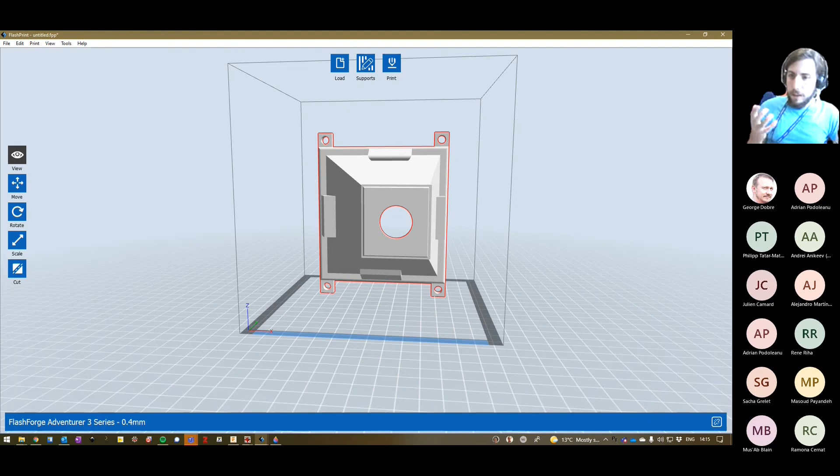But I find that for the vast majority of things, you can probably sketch it yourself, and you're going to be working perhaps more on your own, because ultimately you just want to print a little bracket or a little something to help you get going. Very specific to your application, usually. Although, as George said, if there's something complex, perhaps we should document it and keep it in a centralized location so people could reuse it. But then that is assuming that people are going to be using the same kind of software to open it.

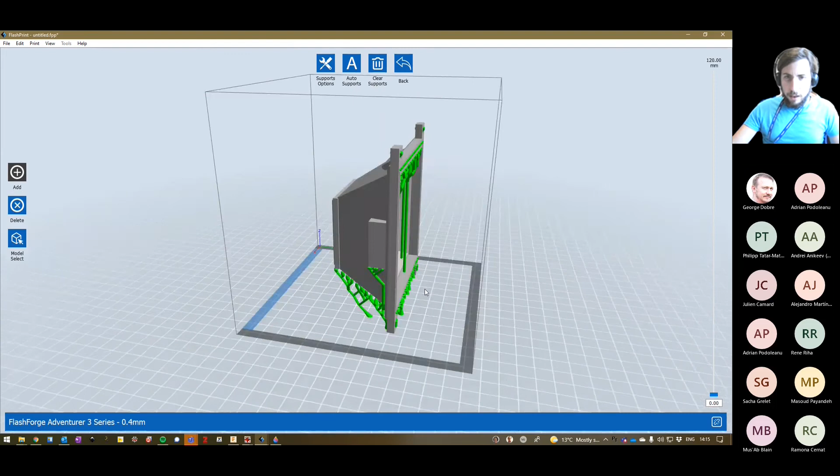Okay, so now going back to this. As you can see, in this orientation, it's terrible. If I hit the supports button, it created this plethora of supports. It's not the preferred orientation whatsoever. So we're going to clear the supports, go back, rotate it, and then move it to center it on the platform. Okay, so this is probably the best way, but the issue still is we are going to be creating the support structures on the inside.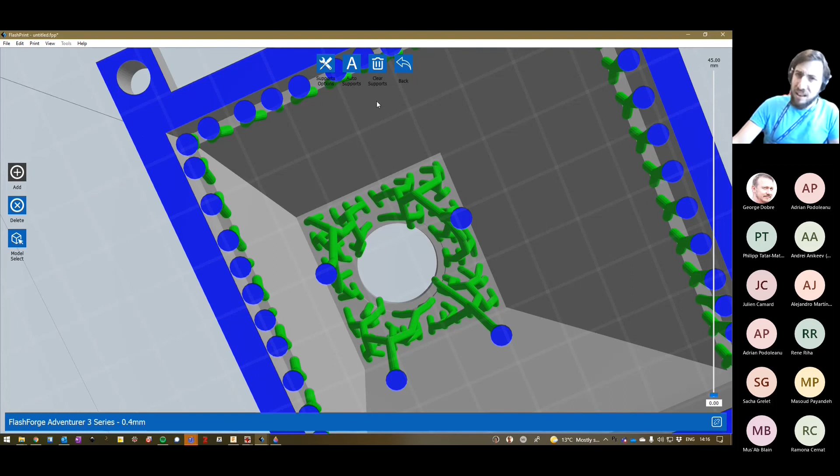And the issue here is we're going to need to remove these sacrificial structures here. But this surface, I want it to be nice and smooth, because it's where the imaging dish is going to be resting. I could always file it, but it's not the best idea to have something a little bit rough here.

So actually, what I'll do is delete the supports, go back, and instead I'm going to cut this into two pieces. So how do I do that? We go here, and we do plane Z. We move it, and we cut. And now, take this and we put this out.

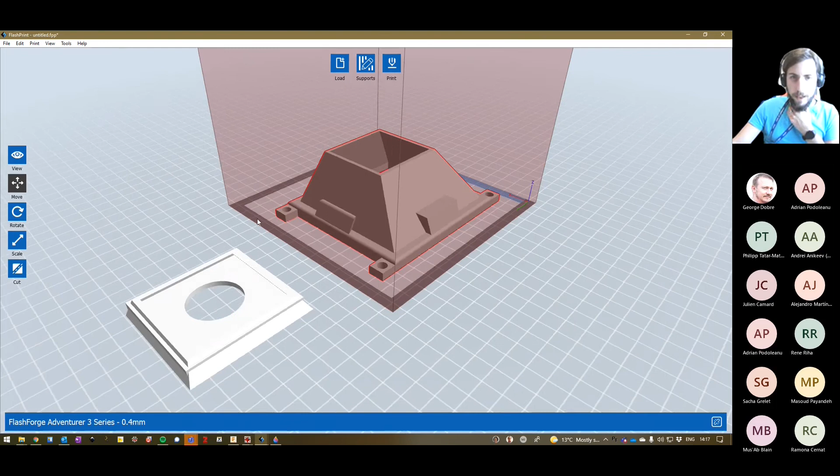So actually, you can print this one first and then print the second one. So you have to remove this bit. But in this way, when you're supporting it, sorry, this is going to be a lot easier to print than the thing combined. And then you can glue them later.

You can use hot glue. You can use cyanoacrylate, i.e., super glue, and you can place the things in place. Or if you want to do it even with no gaps, you can dig out the old soldering iron, and after you've glued it, you can smooth the edges with a soldering iron, because that's just going to fuse the edges and smooth them together. Because again, PLA fuses at 210.

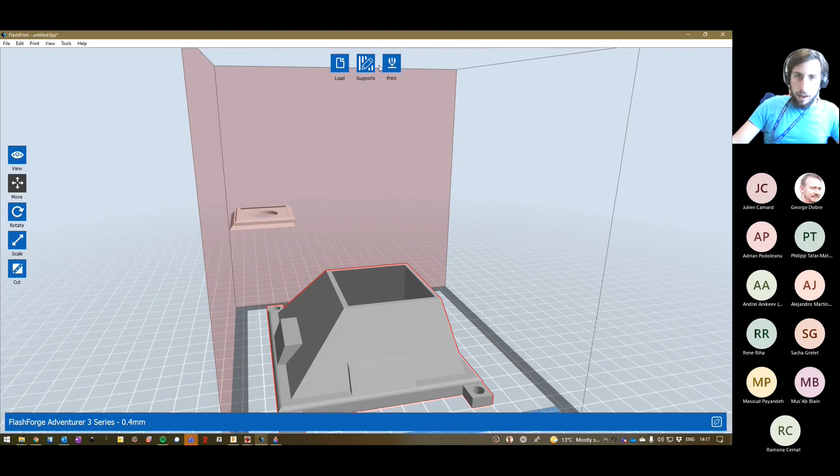Okay, right. We've seen all of these. So if I wanted to print this, I'm going to cut this bit. Yeah, so now it's okay. And now actually I could put supports. Actually, he wants supports for this overhang here. Okay, so we'll leave it, because there's a slight gap here. We print it, and I'm just going to print on default settings, and we've got a raft, we've got supports, so we hit OK.

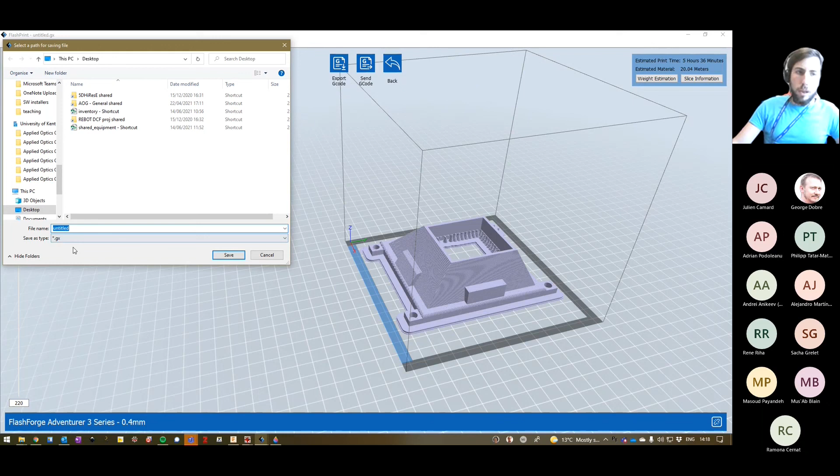And you see here on the top, it tells me how long it's going to take and how much material it's going to use. Now, if the printer was properly networked, which it isn't, you could actually send the G-code straight to the printer and print it directly. At the moment, what we do is we simply save the machine code, which is this extension .gx, and then we simply dump this in a flash drive and take it with us to the 3D printer. So that's what I'm going to do now.

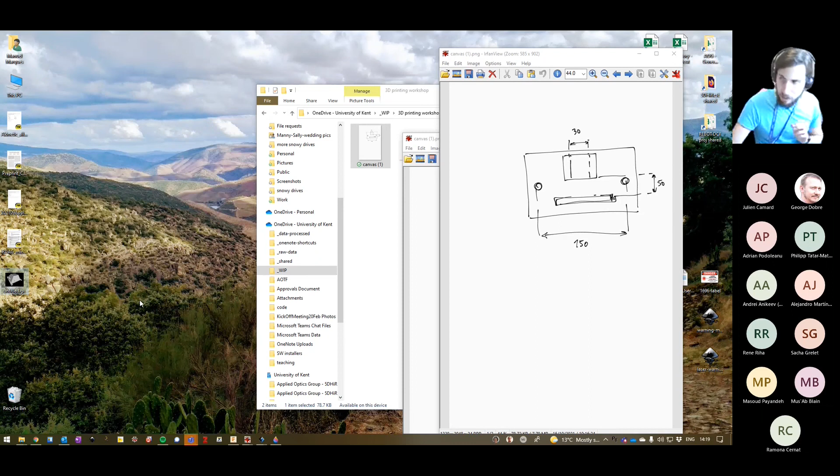So I'm going to switch to my tablet, so I can take you with me to the 3D printer. Just bear with me for a second. Just joining Teams on my other device. Come on, Teams. Yep, join to share content. Add to this device. Okay. Is that sufficient to drink a sip of coffee? Okay. Can you hear me? Yes, we can still hear you, but you still have your screen sharing on. Yeah, that's fine. I'm gonna turn the camera on in a minute. Okay, camera on. Can you see me? Yes, we can. Okay, good.

So I'm gonna switch the cameras around. Okay, so that's the 3D printer right here. Perhaps it will be good if I unpresent the other computer, so my video is actually big in the recording. I'll be right back.

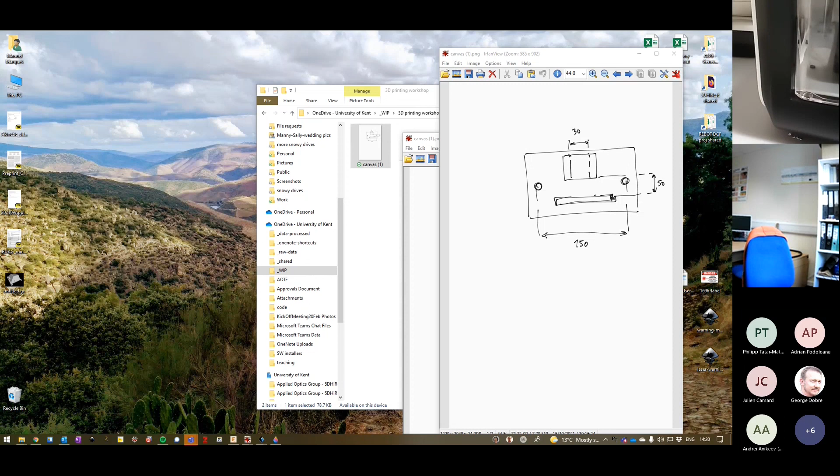Okay, right. So switching the printer on. That's the printer powering up. So obviously this session is very specific to this printer, but most FDMs work in similar ways. It's got some nice funky beeps.

So this is where the filament lives. So we spool it this way. Perhaps at some point we can have a proper session. That would probably not be that useful for Philipp and for the other NetLab students that aren't actually here. But I'll show people how to load and unload filament, those little things that are specific to this printer.

But effectively, to print, all you do is, as I said before, you've got the flash drive, which I've preloaded with the file. Make sure we've got filament, which we do, and then we just plug it in. And this printer has some interesting features which we haven't fully explored. Namely, it's got a camera, so you could monitor the status of the print remotely. It's a bit hit and miss because sometimes the web interface works, sometimes it doesn't. So it's not something I would recommend using too much.

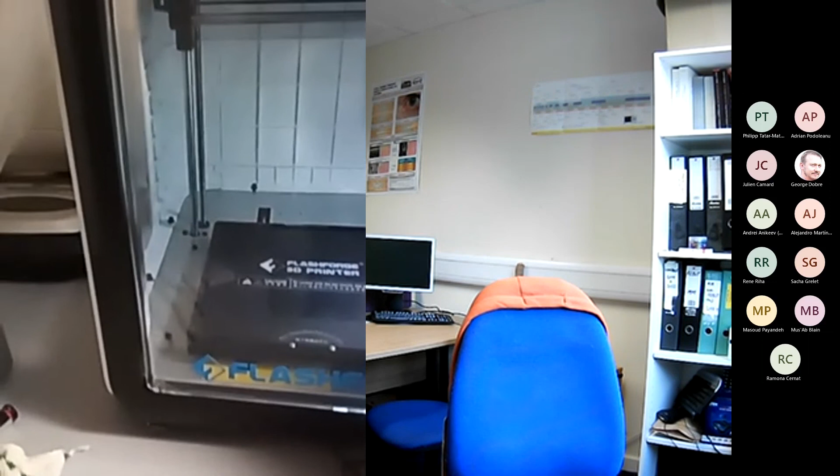So this is how the user interface looks. We can just simply go on the directory, look for a file, say, let's print this little thing here, because that's going to take only 16 minutes. This is something I already had loaded on the flash drive, and all you do is press print, and that should just print with the raft, with everything. Let me see if I can find something simpler and quicker. What is this test rod? That's longer.

As you can see, I've got plenty of things in my thumb drive. I'm just going to print something really simple just to show you exactly what the printer is doing. So let's try this one.

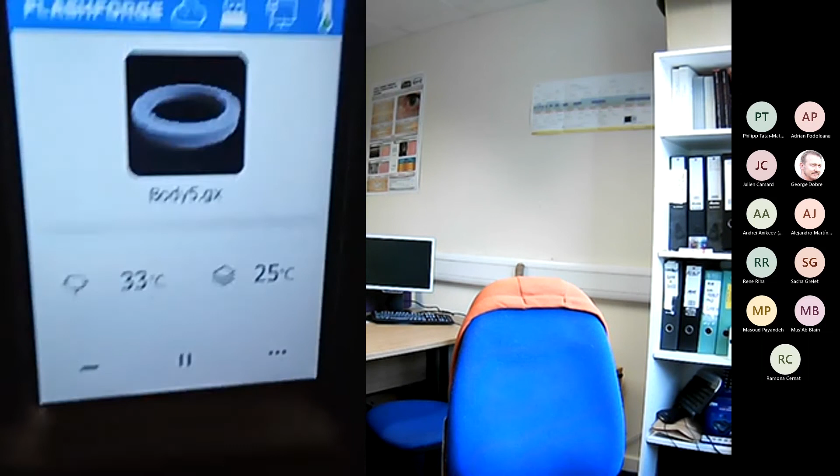So as you can see, if you look here in the control panel, the printer heats up the extruder head. So this here is the extruder, and this here is the heat plate, the base. So the base will heat up to about 50 degrees, and the extruder will go up to 210. So it's already begun heating up, and it's starting to reset to get the

positioning between them. Manuel, can you show the extruder again? Because you said here, and I don't think I could follow. So the display will show you on the left the temperature of the extruder, and on the right, the temperature of the base plate. Good. So on the left, it's currently starting to heat up. Yeah, it's going okay. 47, 53.

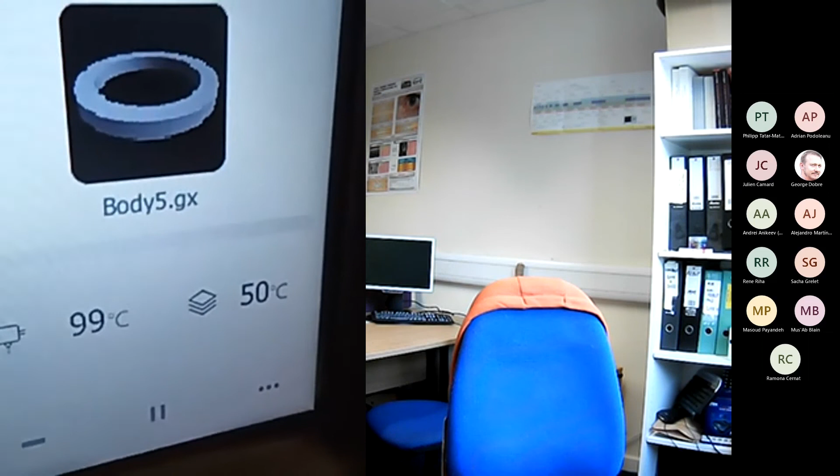So now it's starting to heat up the actual extruder, because the base plate has already hit the actual temperature, which is 50. And as you can see, the extruder is right over here. It's got a little bit of filament stuck to it, but currently it feels very, very solid because it still hasn't achieved the temperature. It's still on 170.

But it's about to start. It's heating, 200 degrees, 205, 206. So it's 210. So as you can see, it began, and it will start by doing the raft. So as you can see, it's printing the raft first. So this is the base of that little ring. Let me get a bit closer.

So these devices can control positions to within a couple of tenths of microns without OCT? A few microns. It's a stepper motor. I think it's 10 microns, the step size of the vertical. It's all mechanical. As far as I'm aware, there's no optical positioner here.

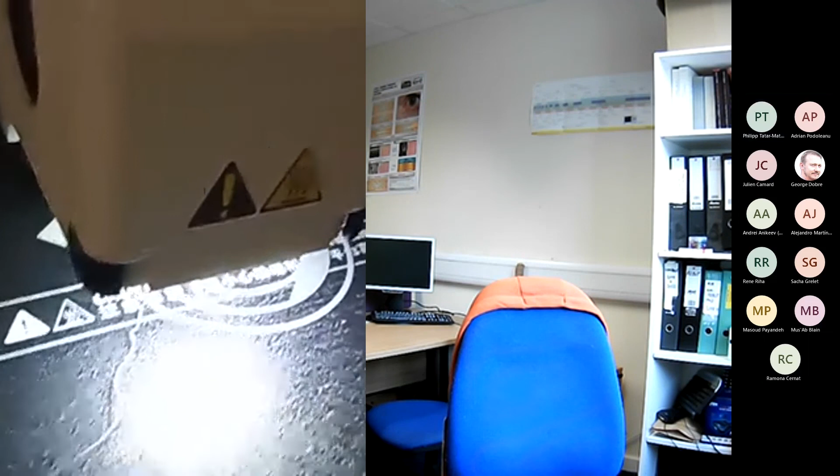I see. Okay. The bits that it's currently printing, none of this is actually part of the actual model. This is simply the base for the raft. Okay, I see. So it's still doing the base. And does it always have the same settings, like the PLA flow and so on? Yeah, this is on the default settings. You can probably get a little bit more technical, more advanced, and do some tweaks. But I found that the biggest problem was the quality of the filament; the printer prints very, very nicely on default settings.

What can happen sometimes is it might fail to adhere to the base, and so you might need to perform what they call a Z calibration. That is just to tell the printer where the zero of the Z stage is. If you're too low, then the nozzle will ram into the plate, and if you're too high up, it might just deposit it in midair.

But depositing it in midair, because we do the raft, the raft is a much coarser deposition. So even if it's deposited in midair, we're only looking for the zero of the Z, I believe. So anything above it is going to be stepped, because the Z is working on a stepper stage.

So yeah, that makes sense. Yeah, it's still doing the raft, as you can see. So the raft takes a bit of time, depending on the complexity and how we slice the model. It might use a bigger or a smaller raft.

And what's a typical infill of the material that you use? The default setting here is 15%, and we only use 15. Okay, 15. Oh, okay. And that still holds your optics and everything? Yeah, no problems whatsoever. Because we do the hexagonal shape, which seems to be the strongest one. But obviously, the infill only applies if the structure is thick enough to warrant having the hexagonal structure inside. Because if it's a very thin thing, then you just have 2 layers.

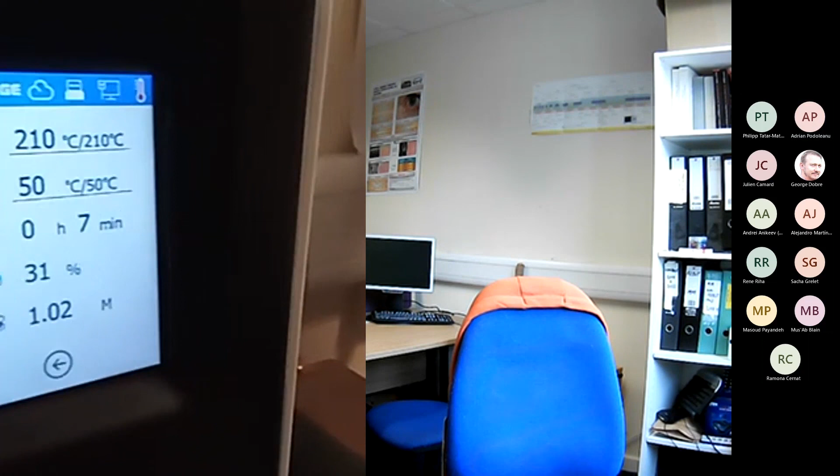Then you just wait. You can see here how much time it's got remaining and all that. So it's pretty simple, pretty straightforward. You can check additional details. You can see how the temperature is currently doing, how much filament it needs to use, what's the progression on the job, and all that.

This can also be viewed remotely if you've got the FlashForge cloud thing, which doesn't work very well. I've used it before, and it occasionally works and occasionally it doesn't. So I wouldn't bother too much with it.

And either way, we've got a firm rule that someone needs to be in the building when the 3D printer is being used, because we're using 200 degrees here. If something gets jammed and locked and the printer doesn't turn off, there is a real possibility that it could catch fire. So because of that, our rule of thumb is we don't leave the printer running if there isn't anyone in the building to turn it off.